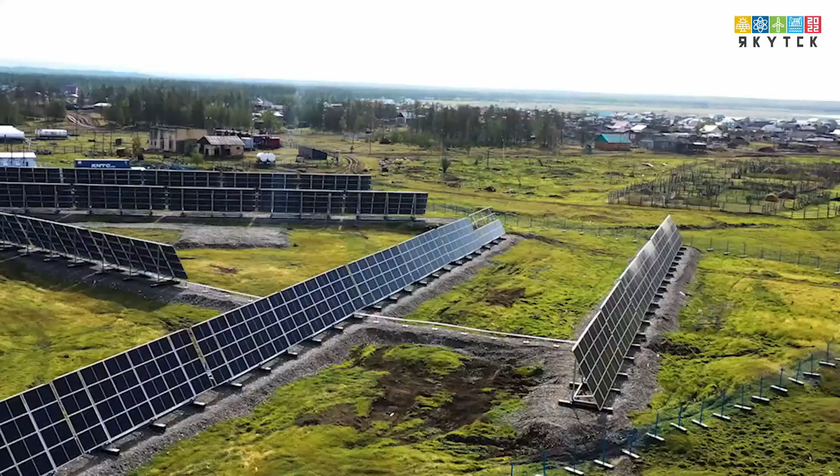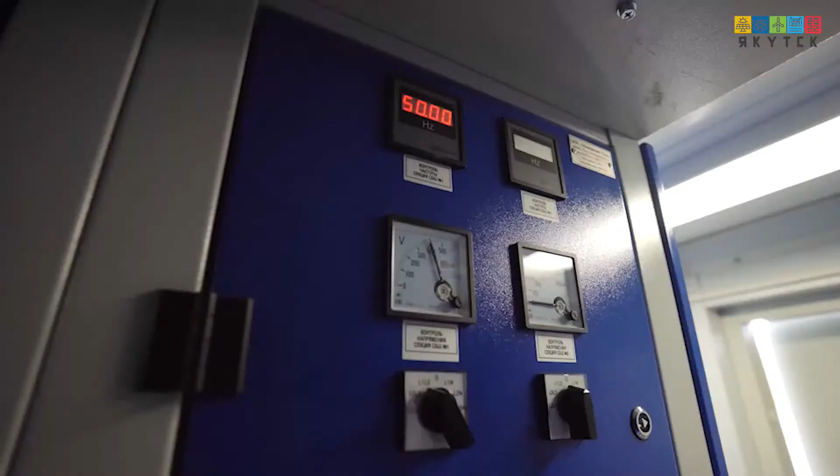Русгидро приняло решение о модернизации локальной энергетики отдаленных регионов Дальнего Востока путем создания современных гибридных энергокомплексов с использованием возобновляемых источников энергии. Первым из них стал энергокомплекс Улахан-Кюэль, созданный в кратчайшие сроки всего за 1 год. Инвестором проекта выступила компания «Комплексные энергетические решения».

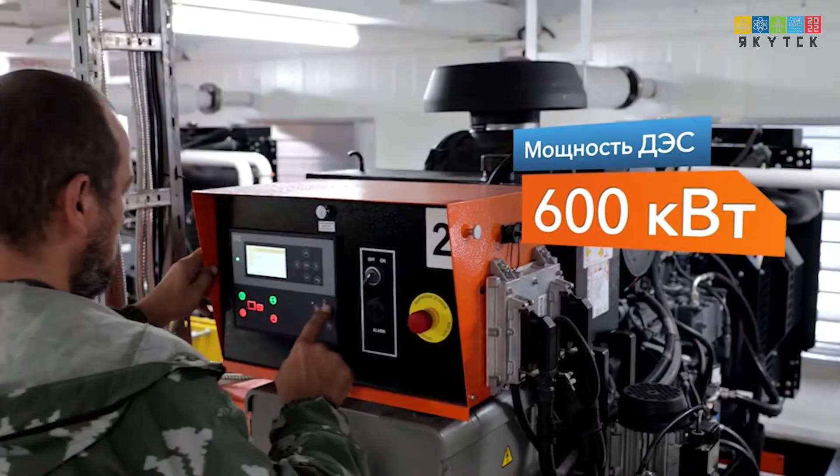Улахан-Кюэльский энергокомплекс включает в себя солнечную электростанцию мощностью 400 кВт и находящиеся под одной крышей высокоэффективную современную дизельную электростанцию на 600 кВт и систему аккумулирования энергии мощностью 125 кВт. Все вместе они объединены автоматизированной системой управления. Энергия запасается, когда Солнце стоит высоко над горизонтом, и поступает в сеть тогда, когда потребность в энергии максимальна. Использование солнечной энергии позволит значительно, практически наполовину, сократить расход дорогостоящего дизельного топлива.

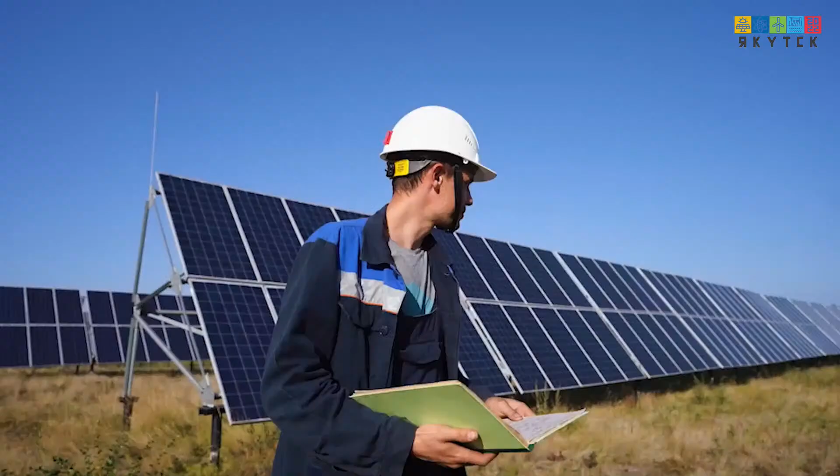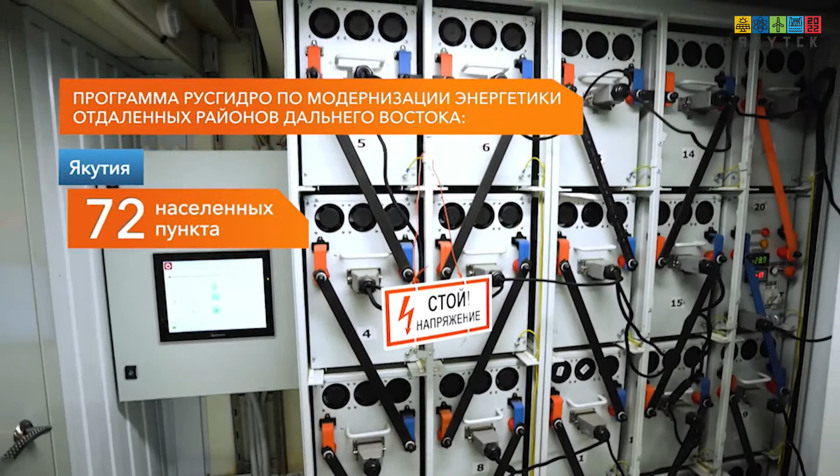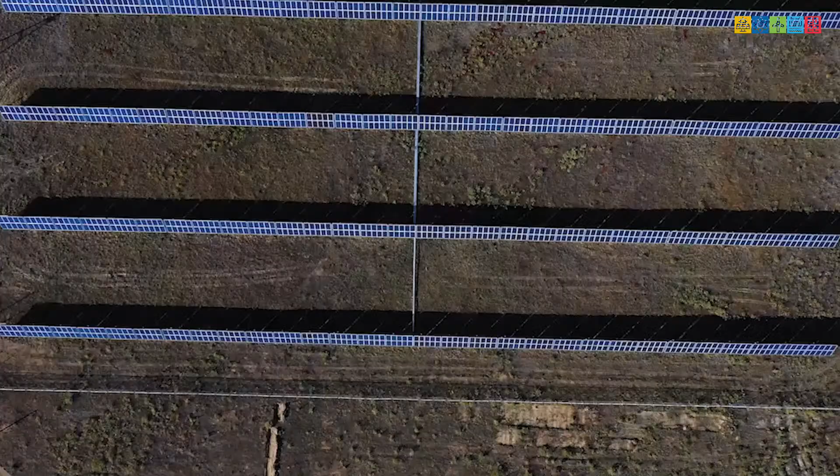Масштабная программа Русгидро по модернизации локальной энергетики на Дальнем Востоке – это создание энергокомплексов в 72 населенных пунктах в Якутии и в 7 на Камчатке. Общая мощность новых дизельных электростанций составит более 94 мегаватт, мощность ВИЭ-генерации – около 29 мегаватт. Все работы планируется завершить в 2023-2024 годах. Особенность программы – использование средств инвесторов в рамках механизма энергосервисных договоров. Возврат инвестиций будет осуществляться в течение 10 лет по результатам достигнутой эффективности за счет сохранения экономии расходов на топливо.

Север Республики Саха-Якутия, Верхоянск. В этом отдаленном городе живет немногим более 1000 человек. Верхоянск – самая холодная точка на карте России. Именно здесь был зафиксирован абсолютный минимум температуры на территории нашей страны – минус 67,8 градуса. Надежность и эффективность энергоснабжения в таких суровых условиях имеют особенное значение.

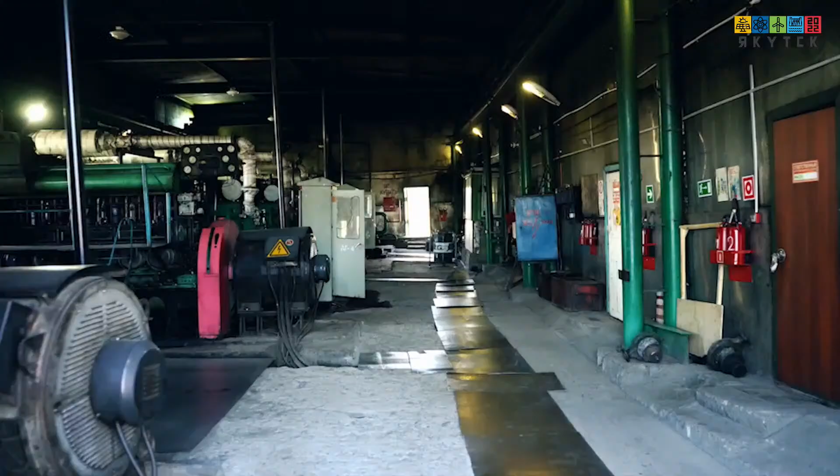В населенных пунктах, подобных Верхоянску, в основном работают дизельные электростанции. Доставка топлива сложная и дорогая. Сегодня Русгидро модернизирует объекты генерации удаленных поселков Дальнего Востока. Строятся новые энергокомплексы с использованием возобновляемых источников энергии. Комплекс в Верхоянске уже второй по счету. Первым стал энергокомплекс в селе Улахан-Кюэль, введенный в эксплуатацию в 2021 году и созданный в кратчайшие сроки, всего за 1 год.

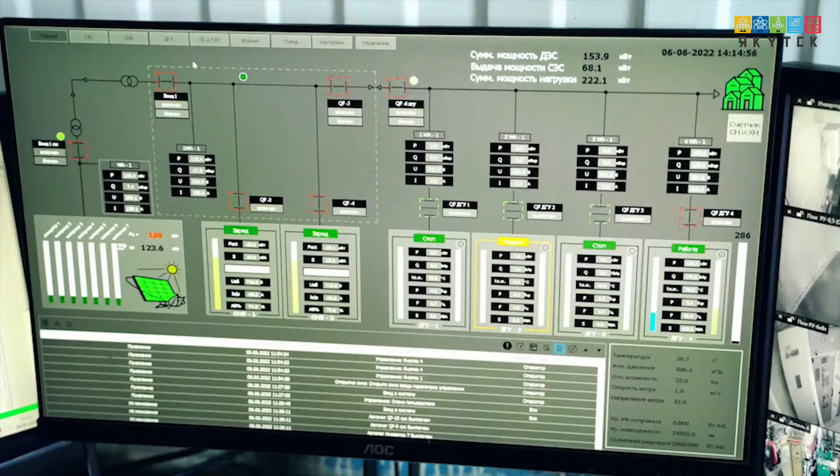В Верхоянске солнечную электростанцию и систему накопления энергии построила по энергосервисному договору группа «Хевел», а эксплуатировать будет Саха-Энерго. Также группой «Хевел» создана система автоматизированного управления, которая позволила объединить в единый энергокомплекс действующую дизельную генерацию, новую солнечную станцию и систему накопления энергии. Возврат инвестиций будет осуществляться в течение 10 лет за счет сохранения экономии в тарифе расходов на топливо.

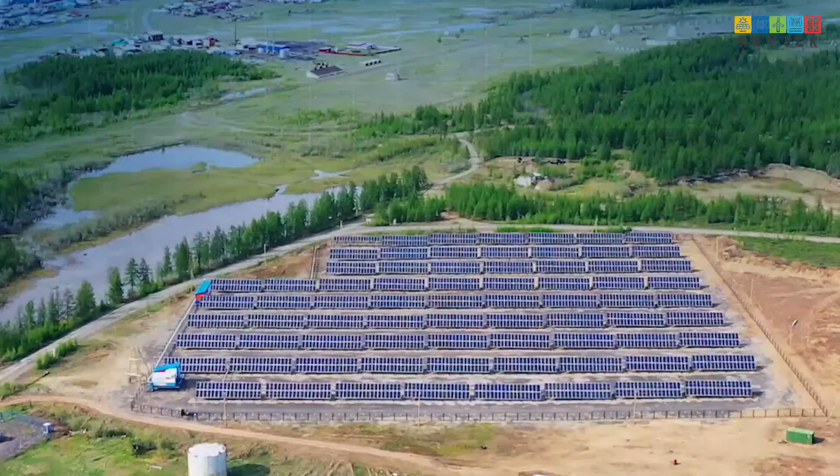Сегодня Верхоянский энергокомплекс – это самая большая в арктической зоне России солнечная электроустановка мощностью 1030 кВт, высокоэффективная дизельная электростанция мощностью 2310 кВт и система аккумулирования энергии мощностью 300 кВт и емкостью 1300 кВт-часов. Все вместе они объединены автоматизированной системой управления. Использование солнечной энергии сокращает расход дорогостоящего дизельного топлива. Экономия составит не менее 28% от его текущего уровня.

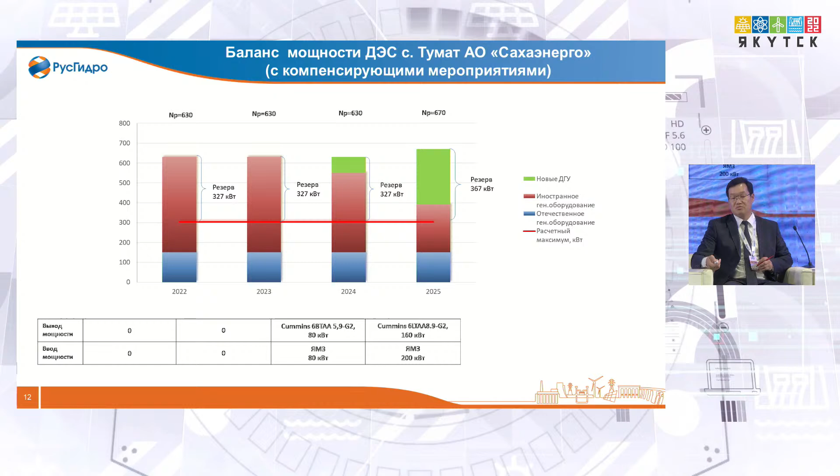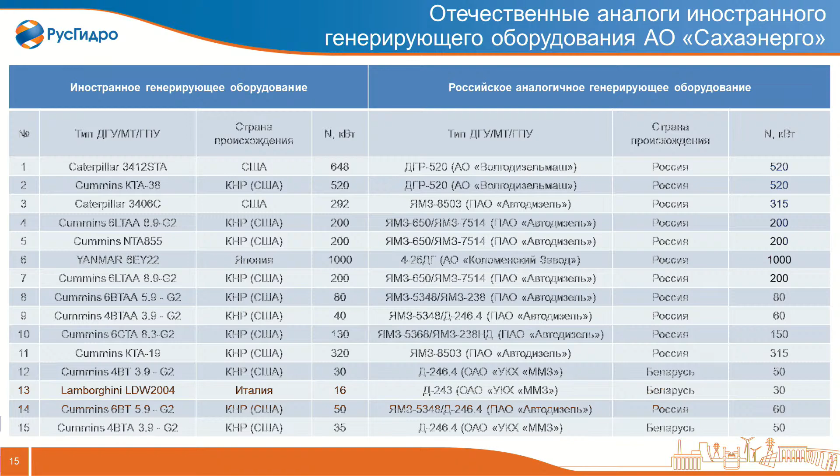This is a diesel power plant in Tumat, also with some compensating arrangements. You can also see on the slide the repair works scheduled for our generating equipment, and we have some Russian-made analogs for this imported equipment, as I said, from the Yaroslavl and Kolomna plants.

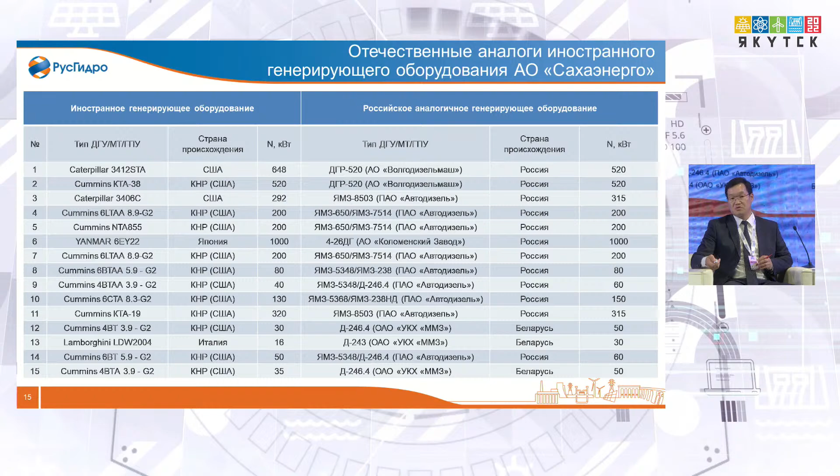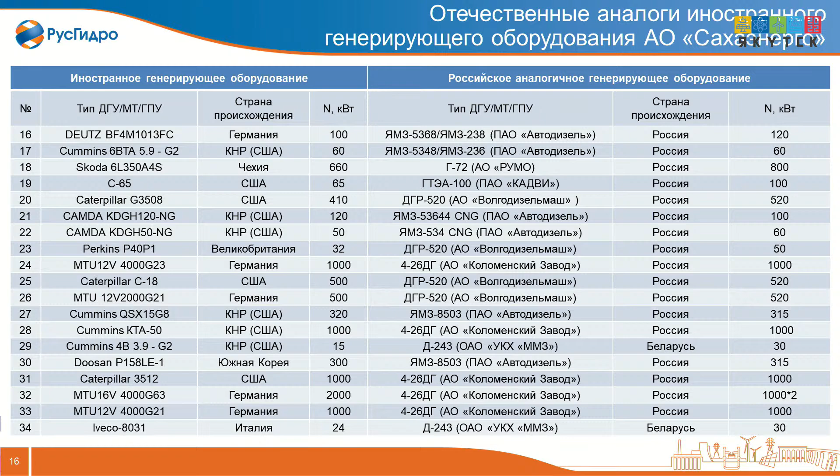The biggest challenge now is for big engines of 800 and more kilowatts, and these issues have to be tackled in the nearest future. But some companies have already declared that they could work on this diesel generating equipment, and we will cooperate with them. Thank you.

So these hybrid technologies, tell us please how important it is to make these approaches standard. How important is it to standardize these approaches? So what's the most important factor?

The most important factor is that yes, we have to standardize them, because for us as an operating organization it would be very convenient, since it is quite complicated to work on sites with different kinds of equipment. A lot depends on that, and there is no possibility to somehow adapt to different kinds of equipment. So this standardization is necessary, it's vital.

Yes, thank you. Let's hope that you will have a full range of equipment from Russia that could match the imported equipment, to ensure the entire, full life cycle. So thank you, Mr. Kondratiev.

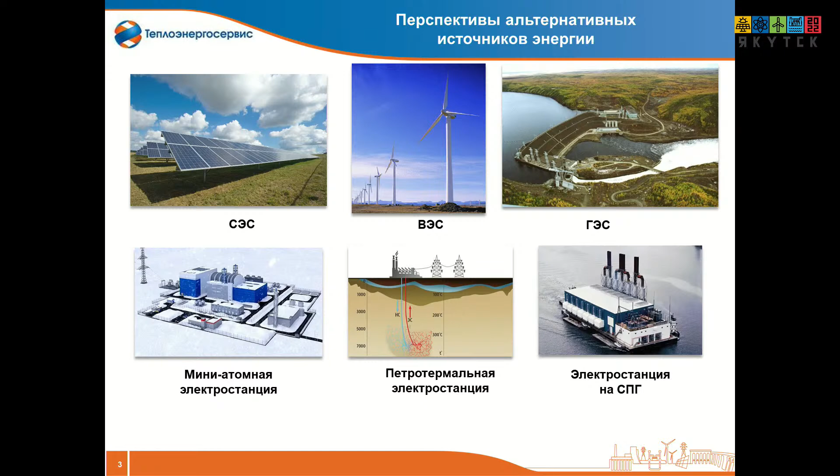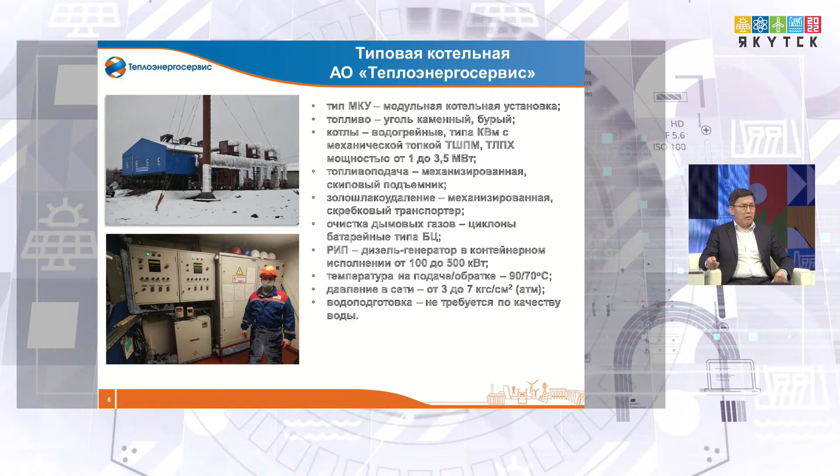Teploenergoservis has gone through quite a serious path of modernization, which is now almost over. We have switched from manually operated boilers with 2 to 4 operators to module-type boilers with automated operation. Our equipment is mostly made in Russia, and as for imported equipment, this is not a crucial issue for us because we have analogs from China and even from Russia. Our heating boiler house is about 9 megawatts, and the set of equipment ranges from 1 to 3.5 megawatts.

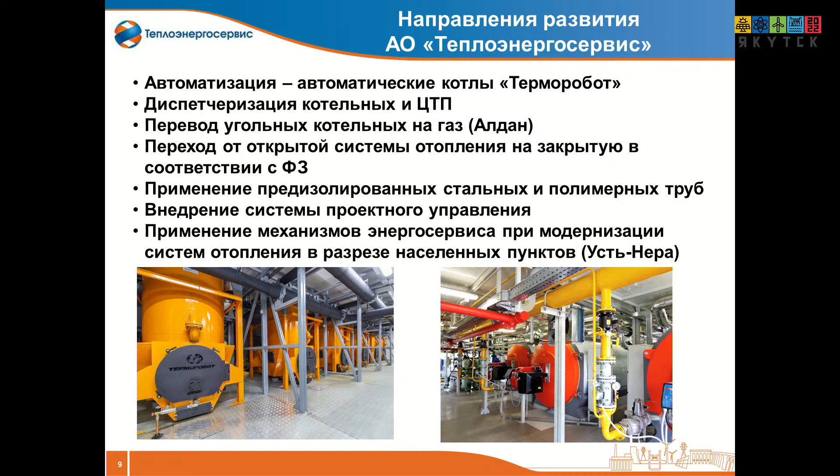We also have projects related to switching to other kinds of fuel, like gasification of Aldan along the Power of Siberia gas pipeline to China, and we hope to get a quite visible effect. It would be a possible project for an energy service company. Also in Ust-Nera settlement we have an energy service project of optimizing 2 coal boiler houses. We plan to construct 1 boiler house, reduce the potential capacity, and simultaneously increase the energy efficiency of the consumer. And getting back to the picture I showed at the beginning...

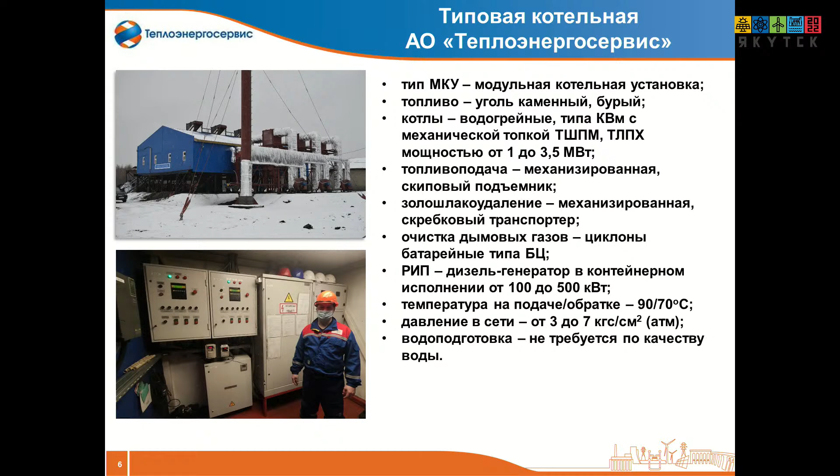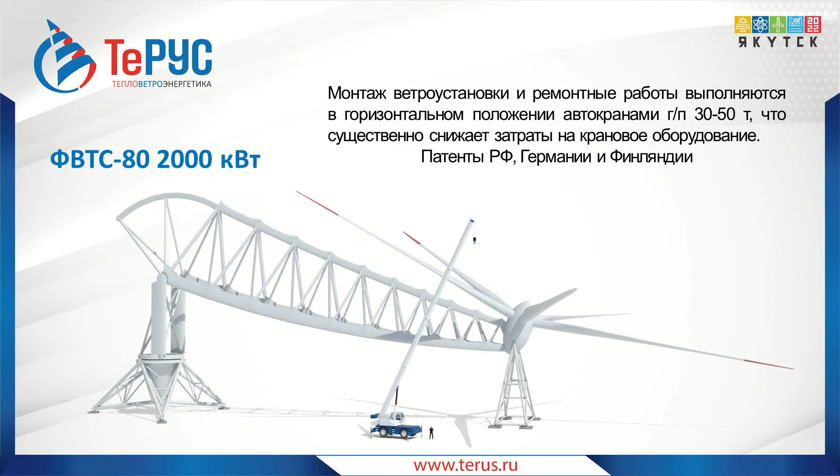It is assembled and maintained with widespread auto cranes and a standard winch. If forced maintenance is needed, we either replace the blades or do any other repair.

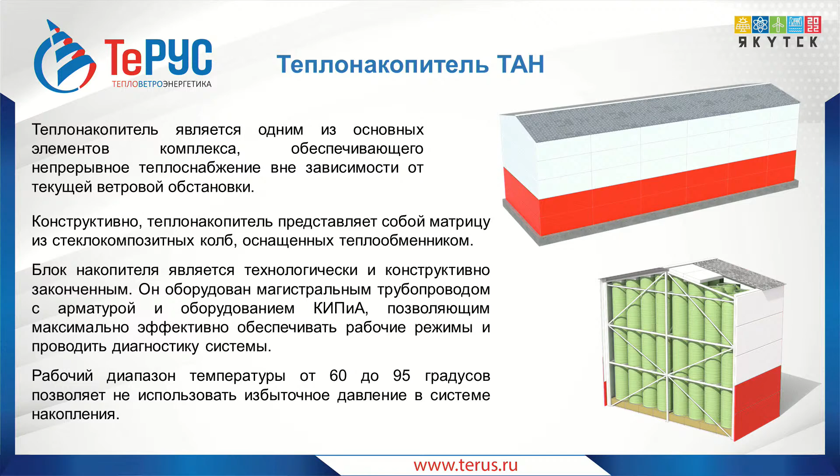Electricity accumulators are quite widespread now, but they are expensive, and we understand that the consumption of heat accounts for some 60%. So, in our opinion, accumulating heat energy is quite reasonable and quite cheap.

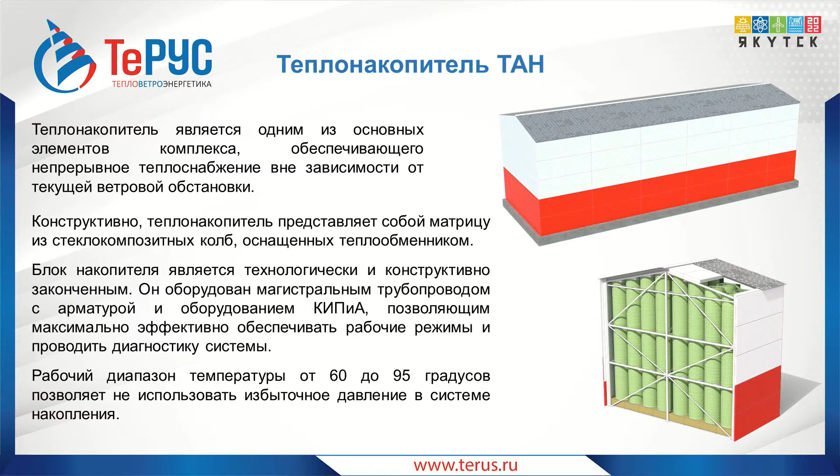We have designed such accumulators. They are of matrix type, made from composite materials. They are quite environmentally friendly and safe.

The accumulation capacity can be adjusted depending on the non-windy periods and consumption gaps.

Another nuance is that the temperature of the carrier is not very high, up to 95 degrees, and that's why the pressure is quite low in the system.

It can be used as separate equipment for the difference between night and day tariffs.

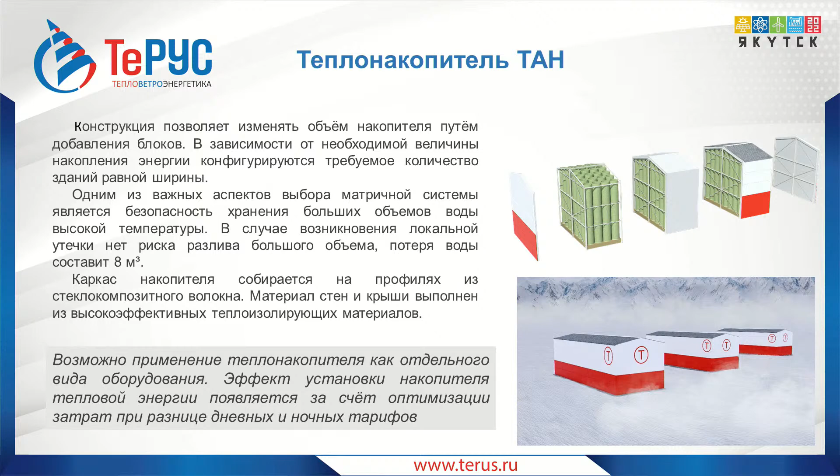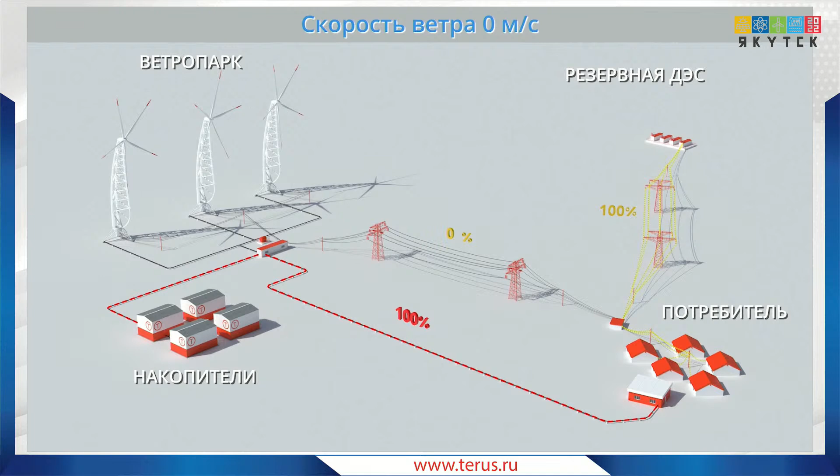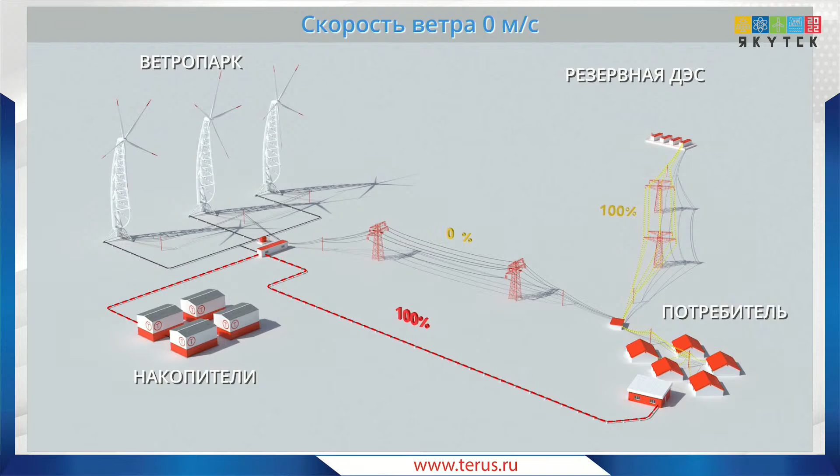So again, the entire complex - the wind generator and the distribution facility - can receive electrical energy and give it to the consumption grid. This is for local use. When there is no consumption, it can be regulated into heat accumulation, and if there is no wind, this heat energy can be supplied from the accumulators to the heating system.

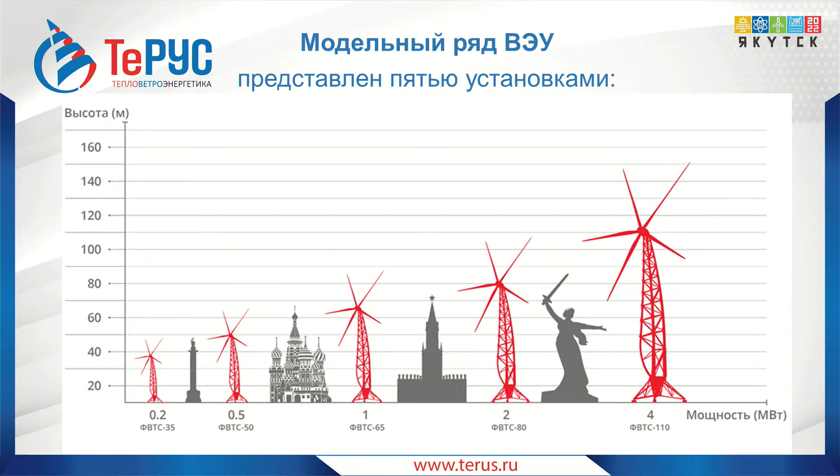So in general, our project - as long as we are a machine construction plant, that's where we make our money - and we believe that this project will be in demand and it will be implemented.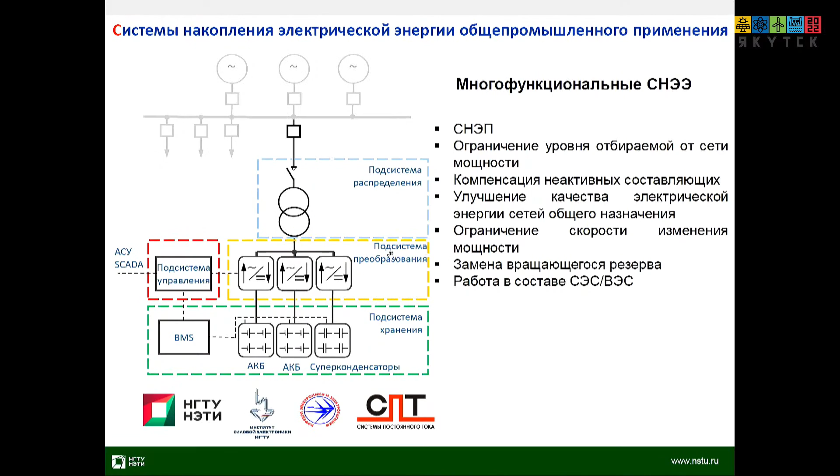Thank you. Our team is working on static converters for standard and customized purposes. At the moment we have developed a series of multifunctional static converters for electrical energy storage systems, which include a system for storage, conversion, distribution and control, limiting the power taken from the grid, compensating non-active components, improving the quality of electrical grids, and limiting the rate of power changes.

So we develop various accumulators based on supercapacitors, also based on lithium-ion batteries for Gazprom, Rosatom, and also for electric car charging stations.

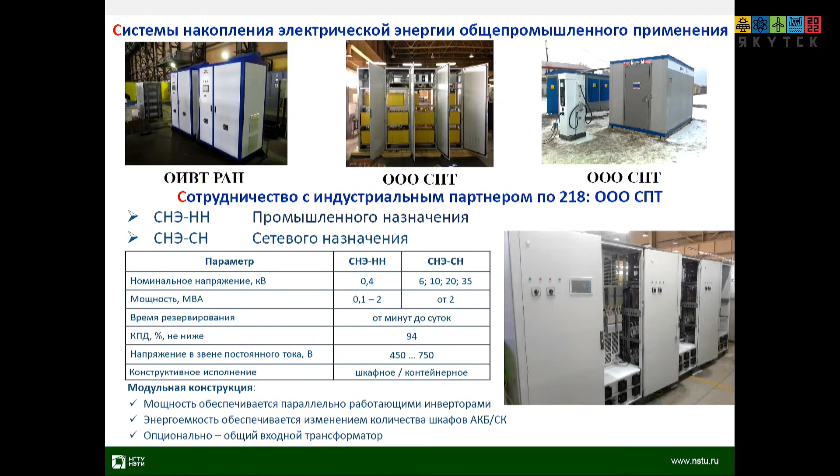We launched our systems at several sites with off-grid systems in remote areas. These grids use these accumulation facilities for storing energy and regulating load. They accumulate the power energy.

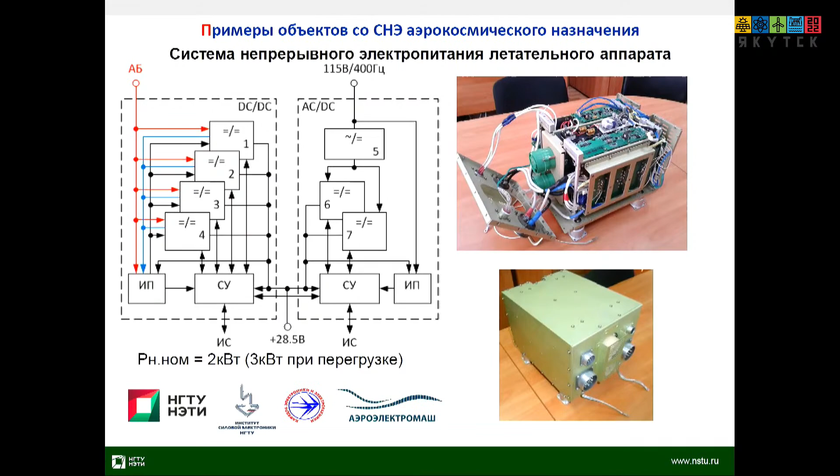So we have developed a new concept for spaceships and developed some technical solutions. And we continue our work within the Priority 2030 strategy.

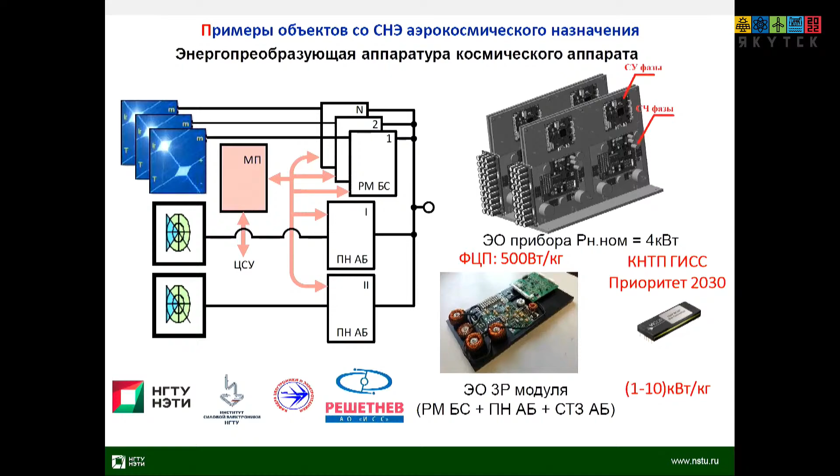So the last two systems developed for space exploration serve as samples of reliable systems, and they can be used under severe climatic conditions. They use only local parts. That's all, thank you for your attention.

Thank you very much for your short but very informative presentation. I understand that you present science here, and also an example how achievements in science are applied in practice. And of course, power blocks are in great demand for all power supply systems. And of course, we are glad that Novosibirsk has this experience.

So, do you have any?

So we use all Russian elements, and they are supported by the radio parts also made in Russia. And there are no limits to the expansion of this system. It depends on how many converters you use.

So Advanced Power Energy company and Diesel company are quite known in the field. Here you see our main products. So we have this gas piston power station, diesel power stations, and hybrid generators.

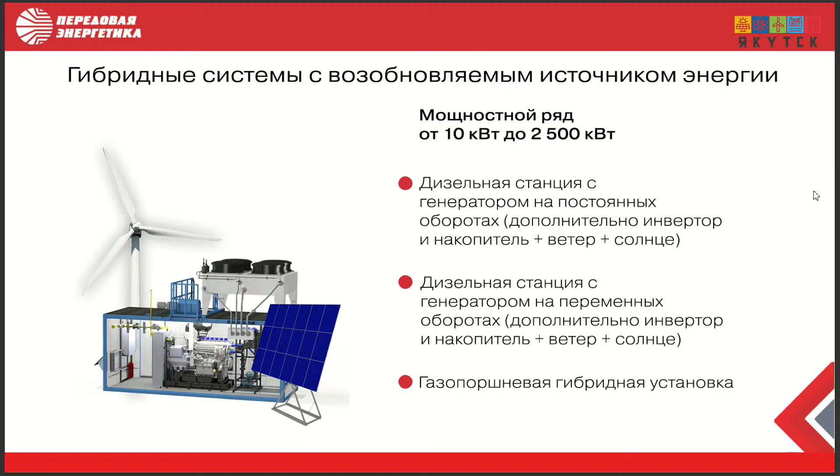At the moment, we produce hybrid systems based on RES, in particular wind farms. And we have come to the conclusion that at the present stage of local energy development, we need to switch to microgrids, which can be used to their maximum.

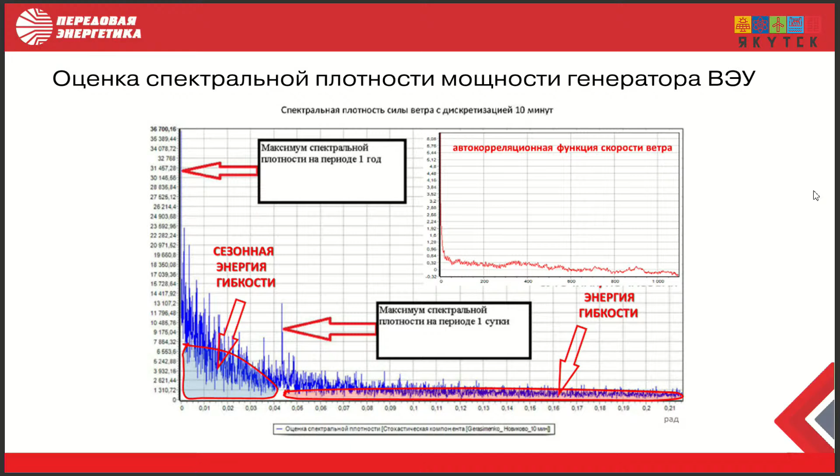And we understand flexibility as an ability of the system to maintain its dynamic stability. And to ensure this flexibility of these microsystems, we need to improve the technology, its architecture, and its control.

So this technology has been tested. We have developed this tracking system which adjusts to the changes in wind speed, and it also distributes the reactive load.

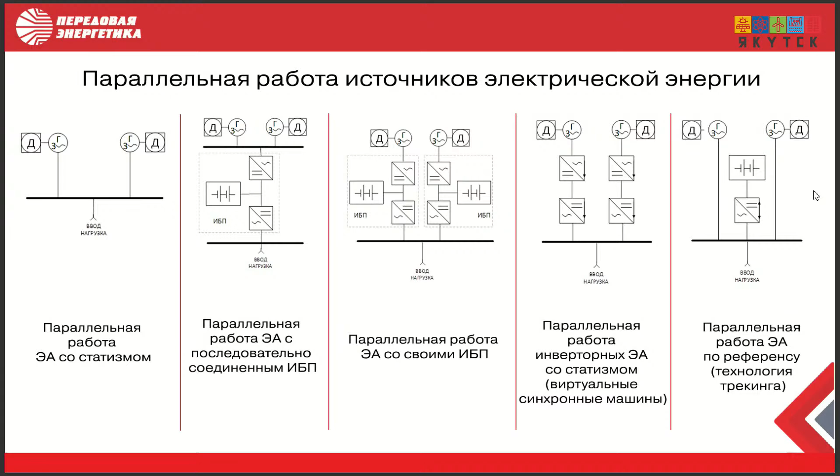A justification is possible for applying one of them in each specific case. And in the feasibility study of each project, you can assume one of them.

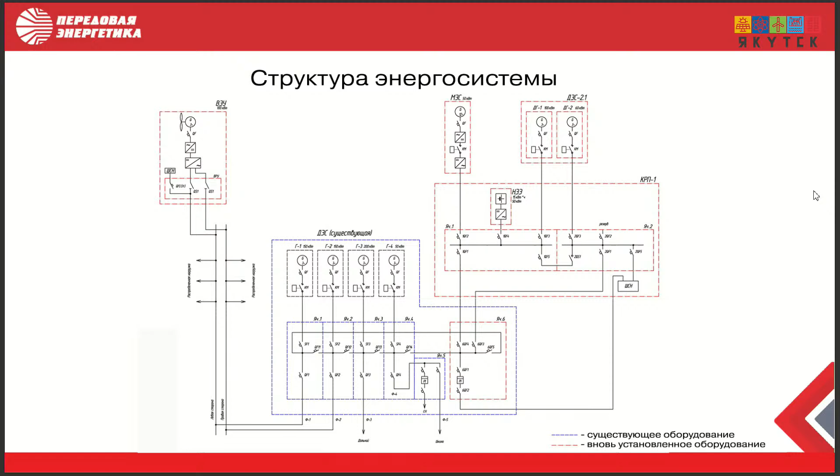So this approach was tested in Yamal-Nenets autonomous okrug, and you see the electric scheme for 1 kilowatt with two traditional diesel generators. So this system combines wind power and traditional generation, with digital control and access to internet via satellite.

So you can get rid of the upper level of control and increase the reliability of the system. Also, the control system can change technical parameters of the microgrid, thus improving its efficiency.

Thank you for your presentation. As I understand, this is like microgrid technology. Yes, this is microgrid or remote microgrid.

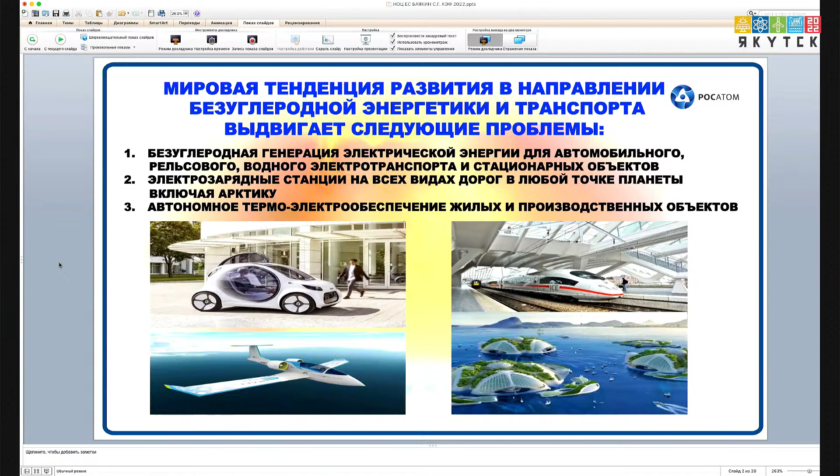This is already a proven technology. So the principle is very simple. Physically, there is no dark energy, perpetual motion machine, or anything like that.

The only source for our planet is the thermonuclear energy of the sun, which comes to the surface of Earth, and actually, if you manage to accumulate this energy, you can boil a kettle on one square meter.

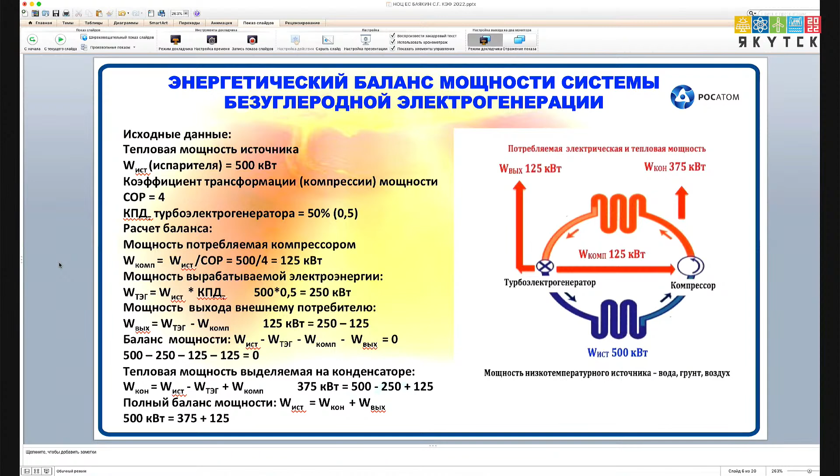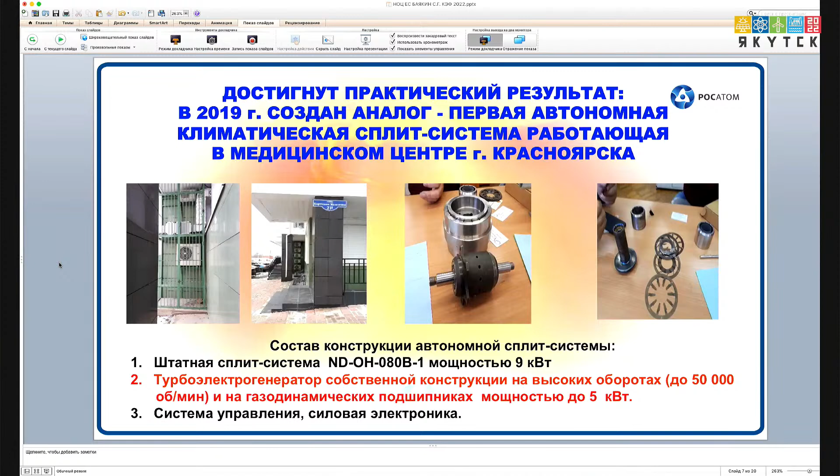Here we have some external heat source. A medical center made a small unit which has been operated for 2 years already.

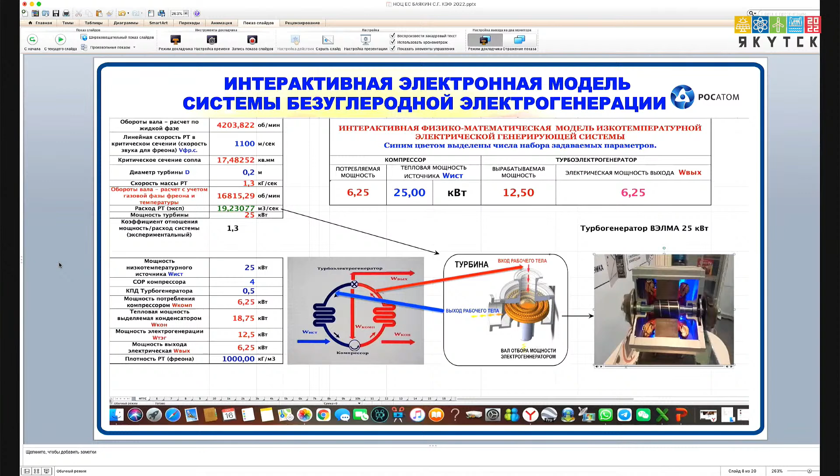Undoubtedly, we have developed an interactive model for making the necessary calculations.

So first is the Velma system. It works on permanent magnets with high rotation. The higher the speed, the less the weight. That's why this unit for 25 kilowatts weighs only 22 kilos.

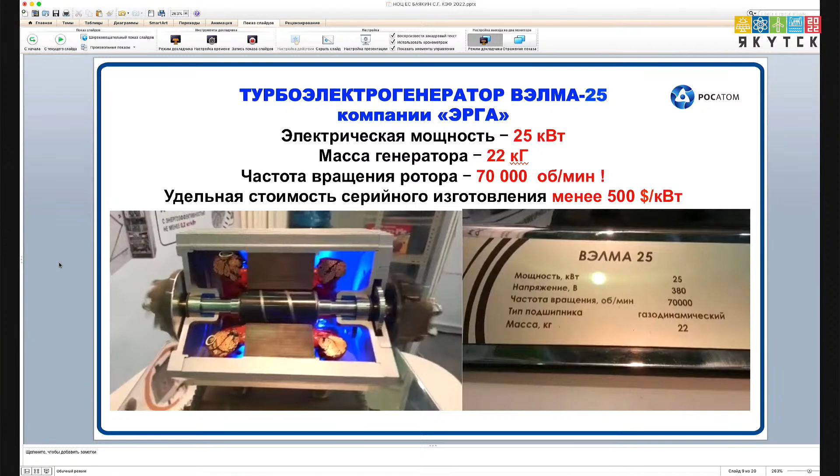So it's super autonomous. That's how this unit works. You have a turbine on one side, a compressor on the other side, and through 2 heat exchangers you have freon, and that's how it works.

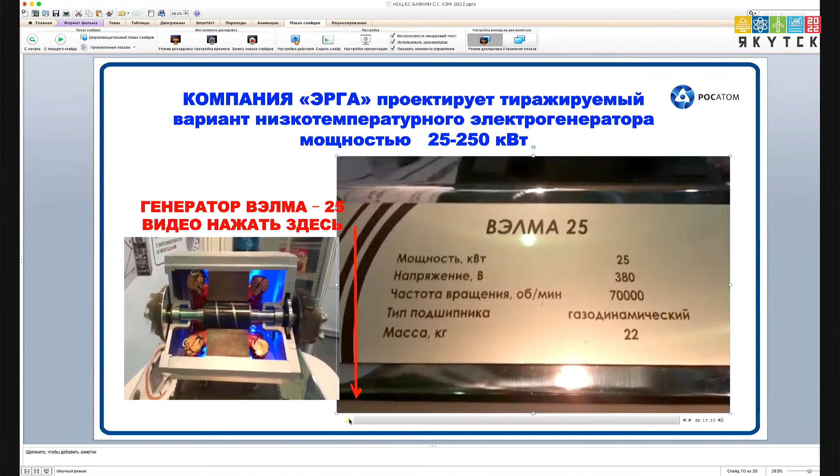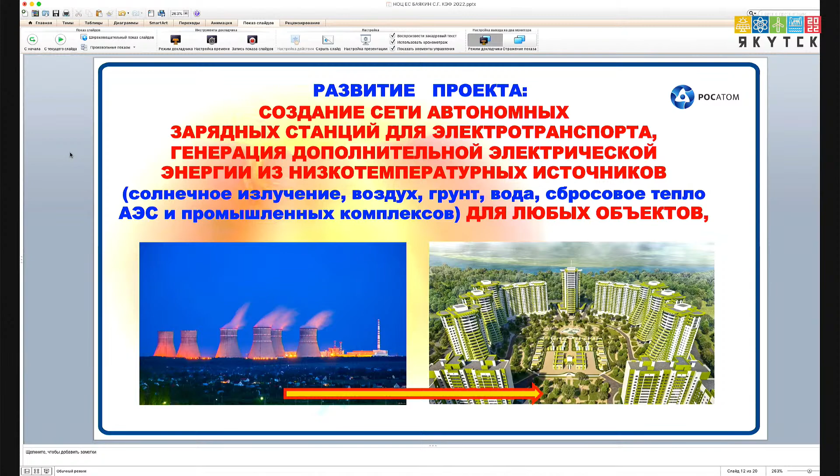So it can be used for nuclear power stations. They also produce lots of heat, which can be used more effectively. For example, calculations for the city of Krasnoyarsk: the water discharge of Krasnoyarsk hydropower plant gives 8 gigawatts of power, while the capacity of the hydro plant is only 6 gigawatts.

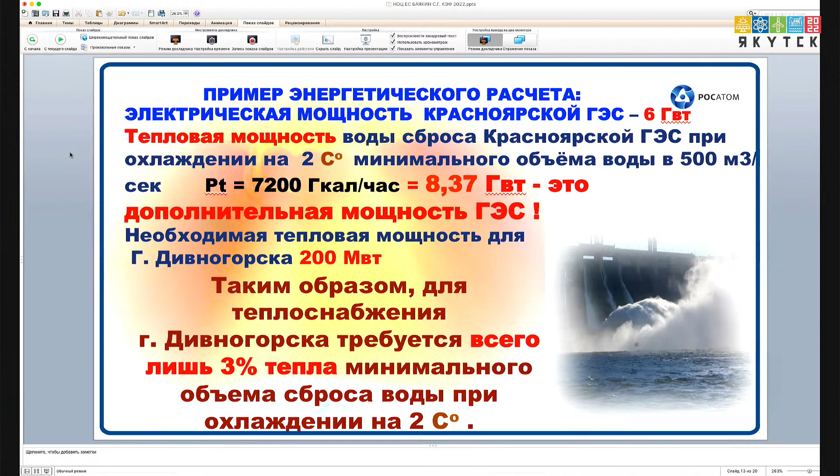So that's why, dear colleagues from Yakutia, we have been friends for a long time, and we have cooperated under different programs, and I think that will be very interesting for you.

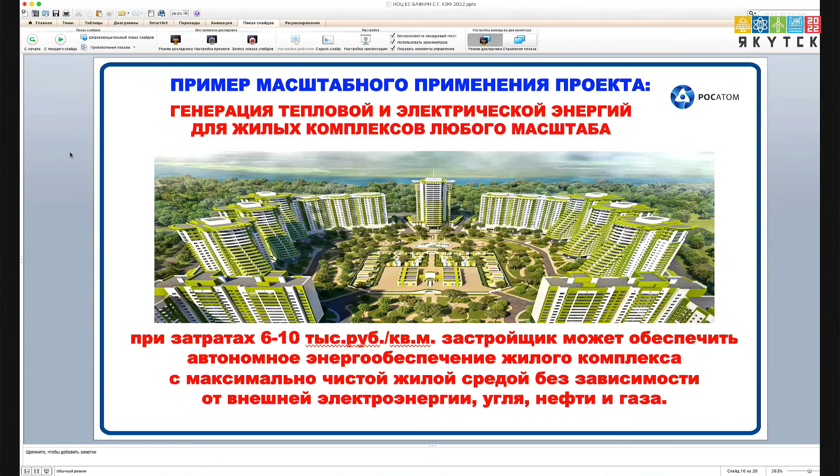And recently we have discovered huge sources of warm water in Siberia, and this gives us unlimited resources of heat. I won't go into detail about this.

As for our Chinese cooperation, we have almost agreed. They have constructed a city for 1 million people, which is heated by marine water, but they still use electricity for operating the heat pump, and hopefully they will get rid of it with the use of our system.

And also we have signed an agreement with the mining plants of Rosatom Corporation, and we can work on nuclear projects, but we can work with anyone because the range of application is widest.

And so we calculated CAPEX, and it is less than $500 per kilowatt. So this is the lowest investment into modern power generation.

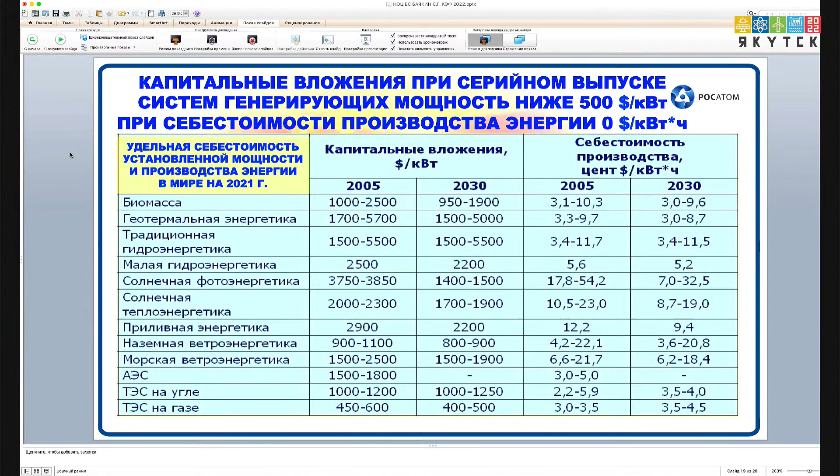So we are open for cooperation, and my contacts are in the presentation. We will be glad to start cooperation. Thank you.

Thank you, Mr. Bayakin. This is a fundamental approach. These low temperature sources, like the Rankine cycle, everything is very attractive. Russia has lots of fundamental research, and we just need to increase the number of commercial products.

Russia has a number of strong engineering schools, like the Bauman School, and we want all these findings to come to the practical stage and become commercial projects.

And we need to use our huge natural and also human potential. On my behalf, I would like to say that Rushydro, especially for testing of new technologies for their implementation into real industry, this year at the Eastern Economic Forum we launched a scientific center on Russky Island, and some of the testing and probing of hydric complexes and other interesting technologies can be done there.